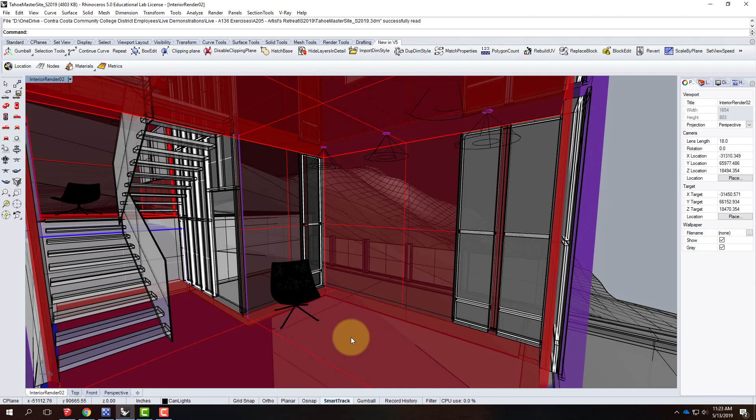And a large part of the section is choosing where in your building you want to cut the section, because there are better places and there are worse places to cut the section. And you just want to make sure that you're thinking about, well, how does this section really show off your building in the best possible manner?

So I went ahead and I opened up my building file again. This is the master site file. I'm going to go ahead and do a save as, because the process of cutting the section is going to be destructive, and I want to make sure that this is a separate version here. So I will call this section 01.

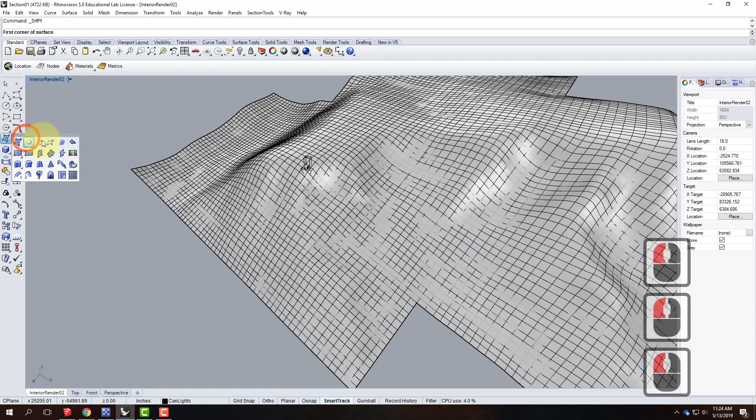There we go. And that way, when I start to destroy pieces of my model, it's not the end of the world. So the first thing that I'm going to do is establish the section plane, which is just a really large plane that intersects the whole drawing. I'll start over here in the standard, and let me go in and create a large vertical plane.

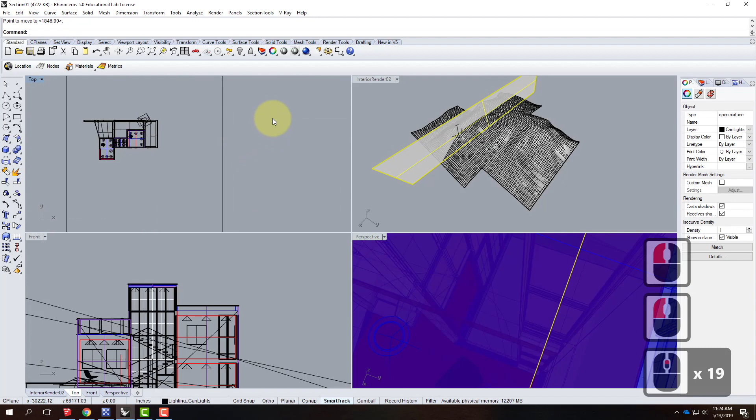I'm going to cut my section so that it goes through the stairs in my building, which is always a nice place to cut your section. Let me move this over a little bit. I may find that it's easier to move it in the top view to see where this section cut needs to be. Once I get close, I'll zoom in here a little bit and fine-tune it.

Like I said, I'm going to cut directly through the stairs because that seems like a really nice place to cut through the building. I could cut on either side of these. And actually, to make it a little bit different, I will look the opposite direction that I usually look. So we'll be looking out this direction. So I'm going to cut toward the back edge here.

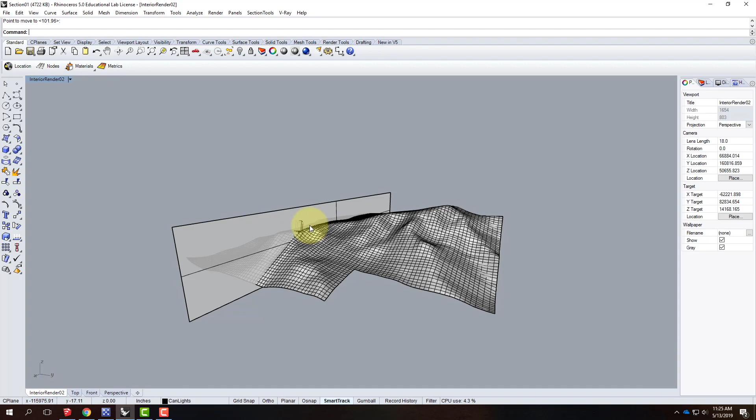So I have that section plane established. I want to make sure that it does intersect the whole model, so I need to move it down vertically just a little bit to make sure that it completely intersects. This particular version, I'm using the Tahoe terrain, and I've turned off all of that big terrain piece. The block is turned off because I don't need that for this particular section. I'm zoomed in way too close, and we're not going to worry about it too much. So I've established my section plane.

Let's go ahead and give myself a little bit of organization here. I'll create a layer called section, and then below that I'll create a sublayer for section plane. And I will take that section plane and move it onto the section plane layer. Change object layer. Make this a little bit bigger here.

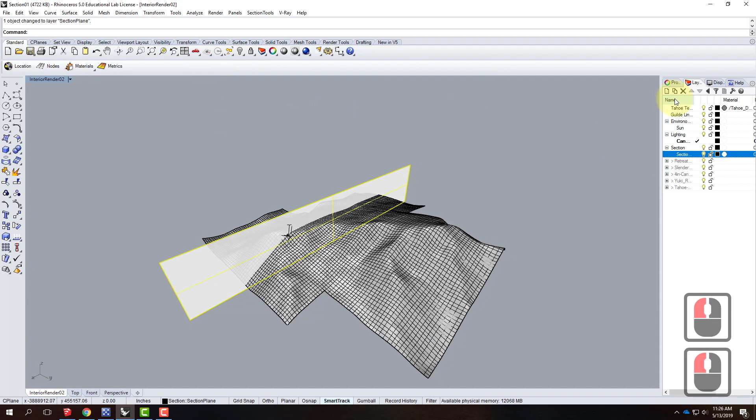And while I'm here, I probably should go ahead and load up my V-Ray toolbars. Let me go to Tools, Toolbar Layout. I'll go to File and then Open. On my flash drive in the Resources folder, I have the V-Ray toolbar. There it is. And I'll go ahead and turn on my object snaps for end, mid, and perpendicular because I was missing those. Probably end up using center a little bit later as well.

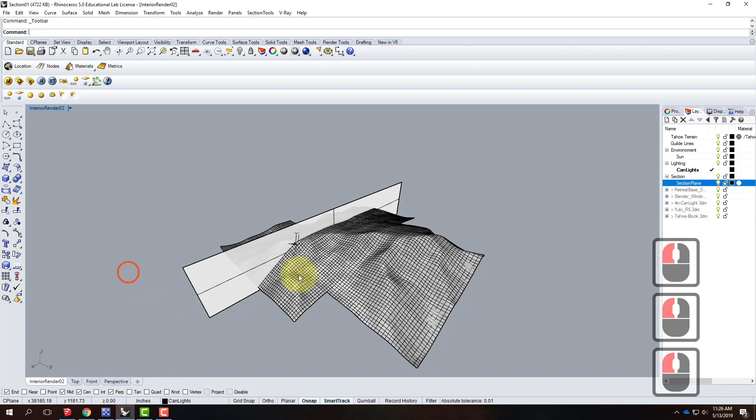OK, so I have my section plane. And just like we did when we were cutting the section before, I'm going to use that section tools command so that I can preview what this is going to look like. And so this time I'm going to look the opposite direction. I'm going to slice through the building over here. Let me actually select the building and zoom selected so that I can orbit around the building. I'm going to slice the building and look that way at the building.

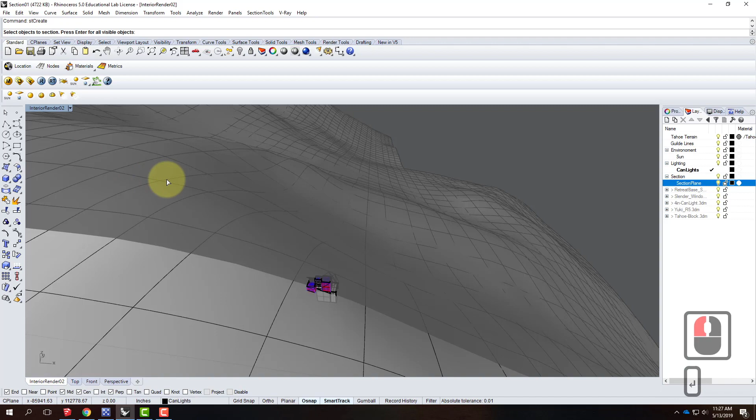So with that established here, I'm going to go ahead and type stcreate. Alternatively, I could go to Section Tools and then choose Create. So I want to create a section. Select the objects to section. It's going to be all. I'll press Enter. But then I'm going to hold down the Control key and deselect that big plane because I don't need to section that plane. I'll go ahead and press Enter when I'm done.

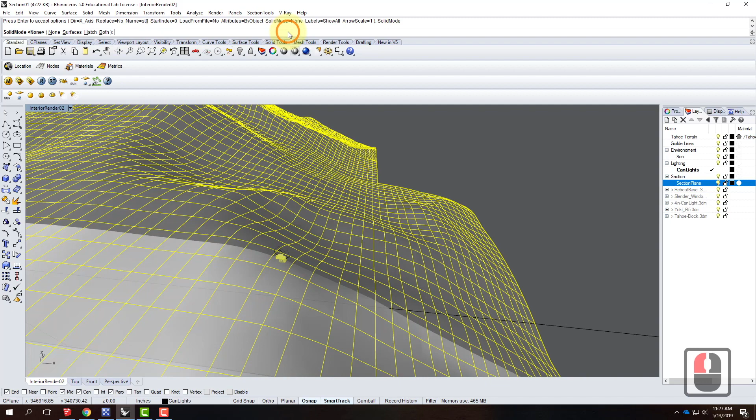And right here in direction, I'm going to look down at my little axes here. It is going to be in the x-axis. And then let's see, the rest of these are all OK. Solid mode should be set to surfaces. Good. And I'll go ahead and press Enter. When I do that, I get my little section icon here. I want to be going the opposite direction, so I'll type F for flip. So it's pointed in that direction.

And then I'll snap to either the center of my plane, which is fine, or at the top of my plane, etc., just so that I'm pointing in the correct direction. When I'm done, I'll go ahead and press Enter, and it creates that first section. Let me turn off the section plane, and then we can view the section or preview the section by going to Section Tools, View.

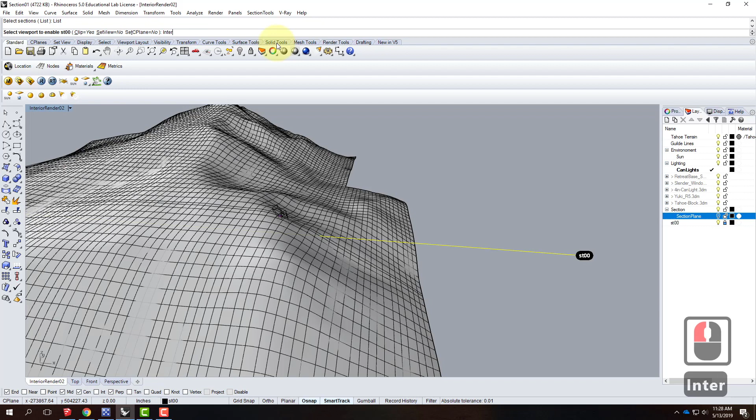And it's available in this list. It's ST00. And I want to view it in the Interior Render 2 viewport, because that's what I'm in right now. So I'll type Interior Render 02. And there it is. Now I can take a look at this.

So let me zoom in on the block. Zoom selected. And there it is. We could see that it was able to cut through rather nicely. I need to worry about what I'm filling in.

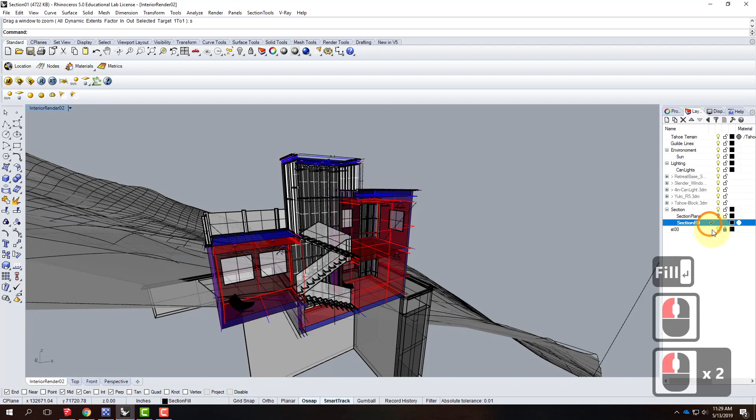So I'll create another new layer. I'll call that Section Fill. Go ahead and make it a sublayer of the section layer. There it is. I'll make it current. And then I need to go through and I need to fill in the parts that I've cut through.

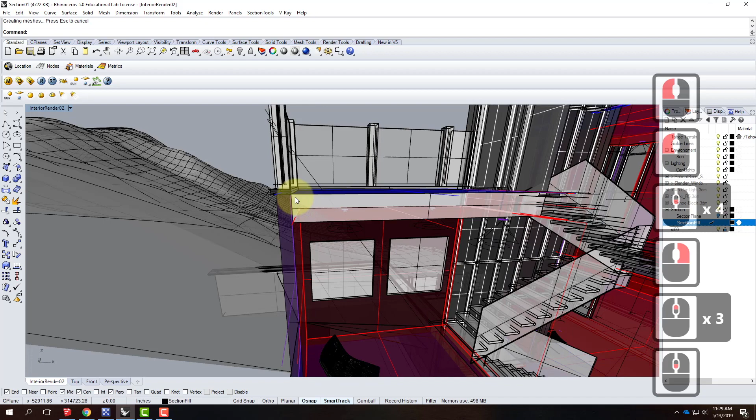So I'll use the rectangular plane 3 points. That always seems easiest to me as I create it. There's my first plane. Second plane. It might be easier to view this in regular shaded mode rather than in ghosted mode.

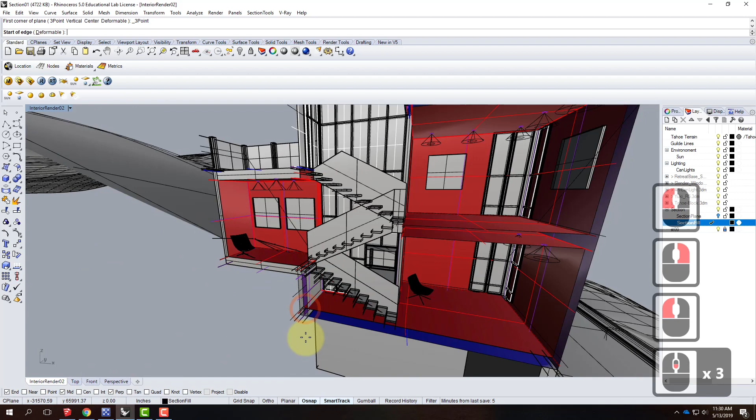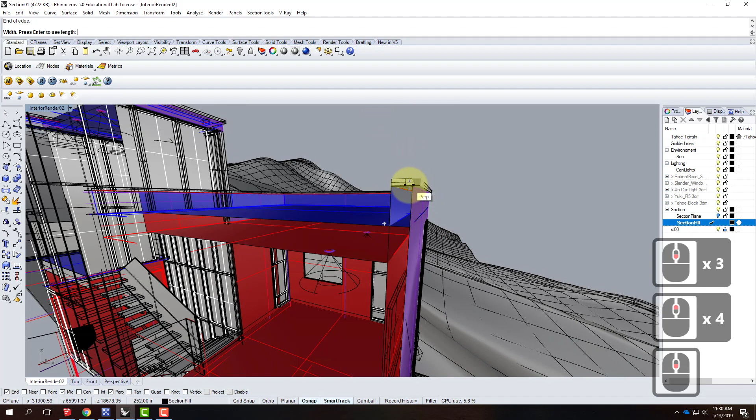Oops, that was bad. I'm going to turn off my center snap because it's not helping. And so bear with me, this always takes a little bit of time, but it is necessary for creating the final rendering.

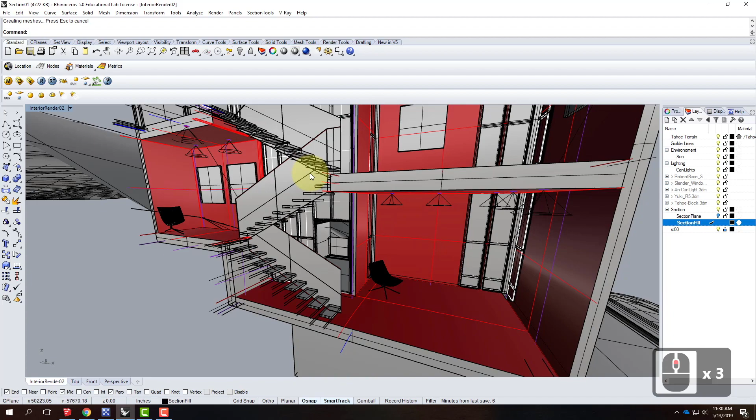All right, looks like I filled it in. The good news is the section tools filled in all of the stairs that I cut through, so I don't really have to worry about those pieces as well. Oh, looks like I got a little piece of roof up here that needs to be filled in. And another little piece right at the top there.

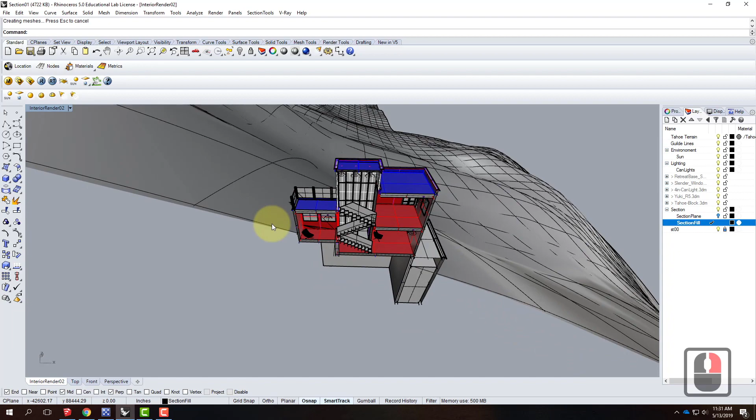All right, so I've got all of those filled in. That's good. That's going to be very helpful down the road for my clay rendering, but it's not quite necessary just yet. I'm going to also offset the curve that goes right along the edge here so that I can create some ground below my model here.

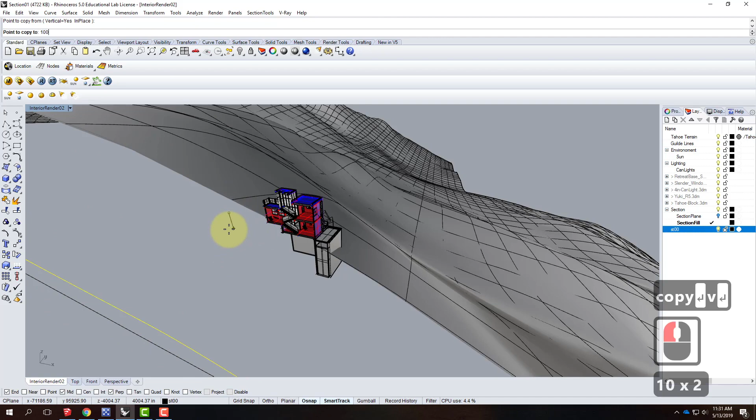I'm going to unlock the ST00 layer so I can actually select this curve. I'm going to copy it, V for vertical, and we'll go down maybe 100 feet. Oh, it doesn't want to do it for me. We'll just put it there. That's good. I'll take this piece and V for vertical again, and we'll move it down.

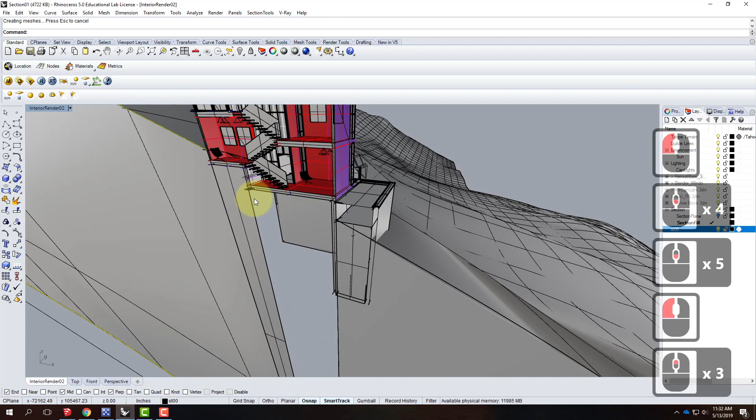And then I could take this, and I can loft those. And I could take this piece, and I can loft those. And then I should add a few rectangles just to finish filling this all in. We'll drop this down. And one more little piece there, like that. I'm just filling that in so that it gives me a nice edge as part of this rendering. Okay, so I have that ready to go.

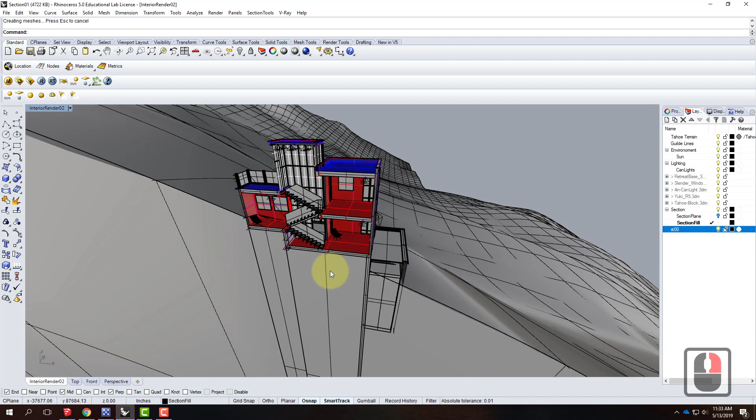Now it's time to set up the actual view so that I can do a make 2D of this particular view. So we'll go ahead and I'm going to switch my view. So I'll go to Set View, and I forget whether this is the front, back, right, or left. We'll try a few. It's not the back. Let's try the front. Let's go to Set View, and let me go to Front.

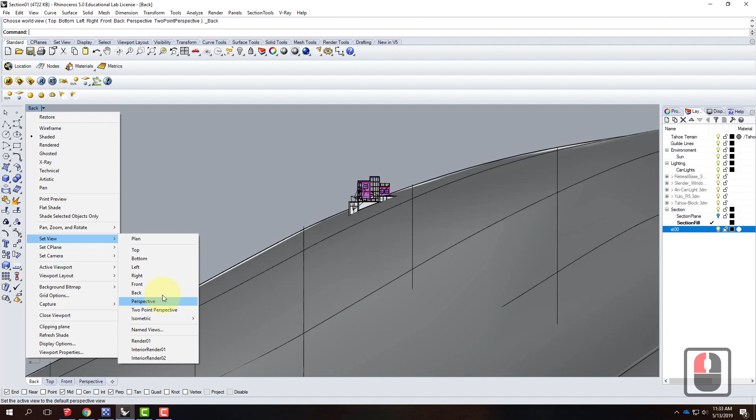There it is. I'm going to position my section so that I'm seeing my section here. And I'm going to save this view. Remember, it's important that we save this view. I'm going to go to Set View and Named Views, and I'll do a Save As. This is going to be the section 00. And I'll go ahead and say OK. That saves section 00 as my view.

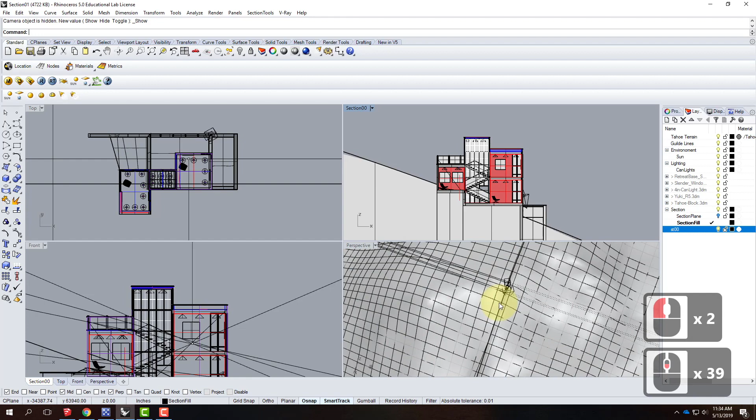It will also allow me to establish the viewport rectangle. So I'm going to go to the little triangle here, go to Set Camera, Show Camera. Remember, I'm not going to see it in this view, but I am going to see it in my other views. So here's Perspective View, and there's my camera points. Let me switch this into wireframe mode,

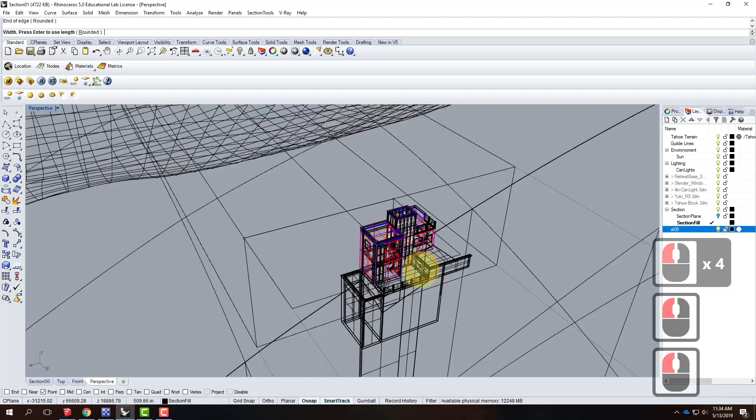and there it is. I'm still on the Section Fill layer, and I will go ahead and draw a rectangle with 3 points. It's not a surface, it's a rectangle. And I'm going to turn on my point snap and turn off the other snaps so that I can hit just the points of the camera. There's 1, 2, and finding the third one in this mess can be a bit of a challenge.

There it is right there. So there is my viewport rectangle, but it's only a quarter of what I need. I'm going to scale it, so I'll type Scale from the upper corner here by 2, and now it's the full size of my rectangle.

If I were to double click out of the perspective view, we could see in the section 00 view, it's just showing along the edges there, which is what I want it to be.

So at this point, it's time to do the Make 2D of this particular scene. If you're having trouble with the Make 2D, you might explode the blocks first. Alternatively, you might turn off some of the more complicated blocks, like the chairs or furniture or whatever.

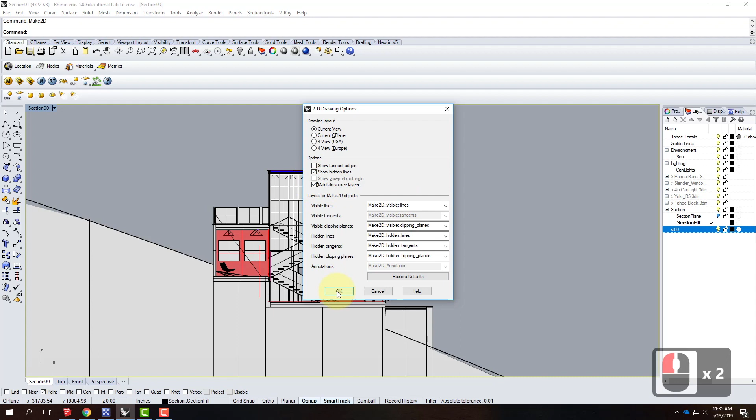So I'm going to go ahead with section 00 showing here. I'm going to type Make 2D, and it's going to be of the current view. I'm going to go ahead and show my hidden lines and maintain my source layers, and I'll go ahead and say OK.

And this is going to create my Make 2D. When it's done creating, I should be able to see it in the top view. Let me zoom selected. Sorry, I didn't select everything when I did the Make 2D.

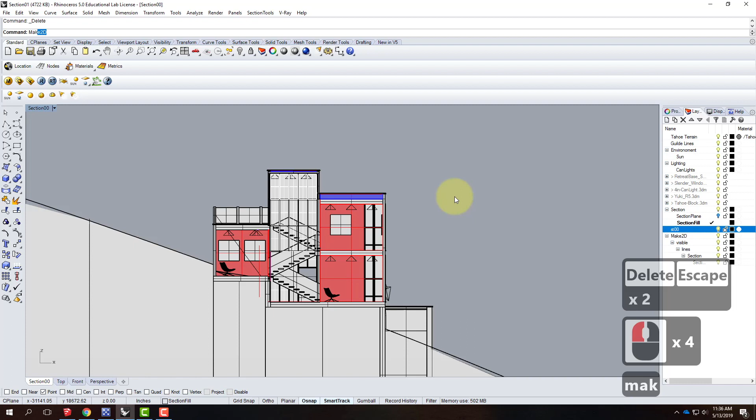Let me jump back. Section 00 here. Make 2D, all, there we go, and I'll go ahead and press enter. Current view, all the rest of these options are the same as the last one, and now it'll take a little longer. I thought it went too fast.

So let me let this go for a little bit. You guys can work. I'll bring you back, and once it's done doing its Make 2D, it can take 2 to 5 minutes or so.

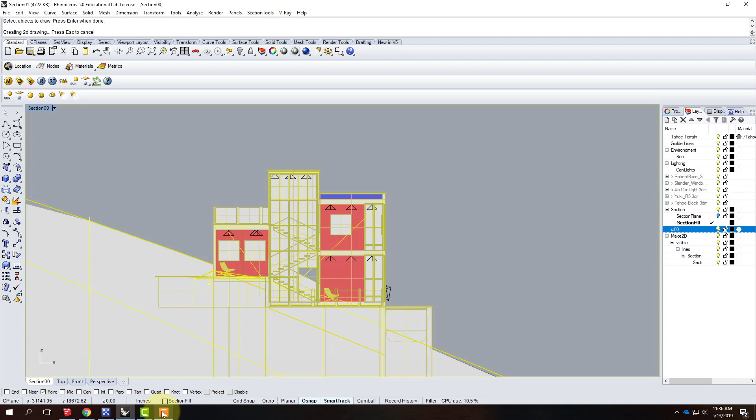Looks like it actually went pretty fast, so let me, in the top view here, let me do zoom selected. There it is. Remember, there's always lots of extra lines that I don't need. The part that I care about is what showed up inside of that rectangle.

So let's use that rectangle and this rectangle as trims. I'll type trim, and I'll get rid of the stuff that is outside of it. So we'll get rid of all of that. There's always going to be a little bit of cleanup to do as well.

I can then take everything that's inside this rectangle. I'll move it so that this corner here, let me turn back on my endpoint snap, is at 0, 0, 0. Z followed by S for selected, enter. And now I'm back at 0, 0, 0.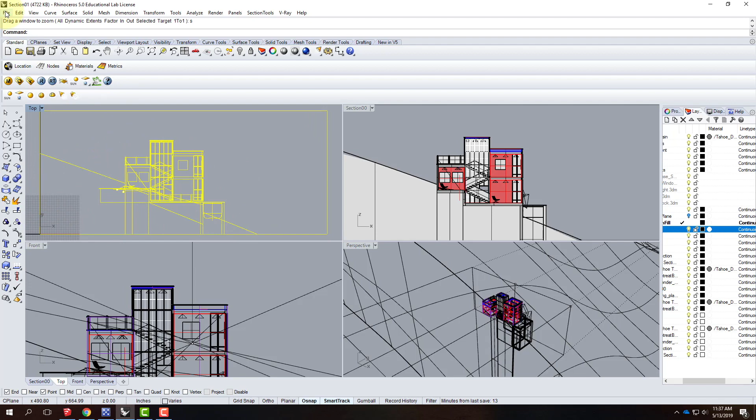There's my drawing, and I can now export for Illustrator. I'll go to File, and then Export Selected. We're going to change this type to be Adobe Illustrator, and I will save it to my flash drive for today.

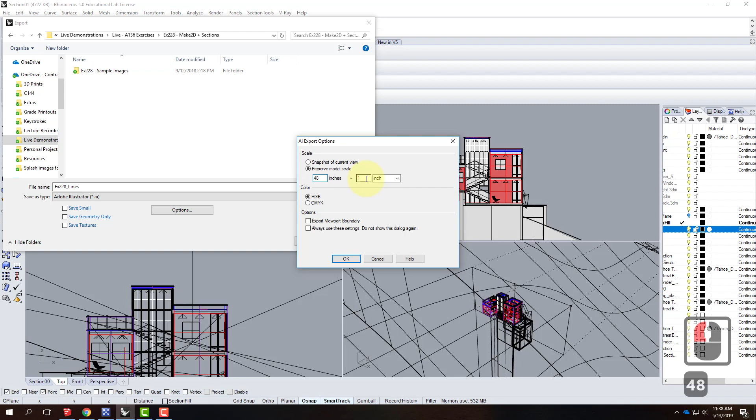And under Options, I'm going to preserve my model scale. It should be 48 inches equals 1 inch. That's for quarter inch equals a foot scale. I can go ahead and say OK after that. And then I can go ahead and click on Save, which is going to save my line drawing for Illustrator.

Let's go take a look at that in Illustrator just to see what it looks like. I'll double click on Adobe Illustrator to open it up. And then once it's open, I'll go to File and then Open. And I will choose that Illustrator file. There it is.

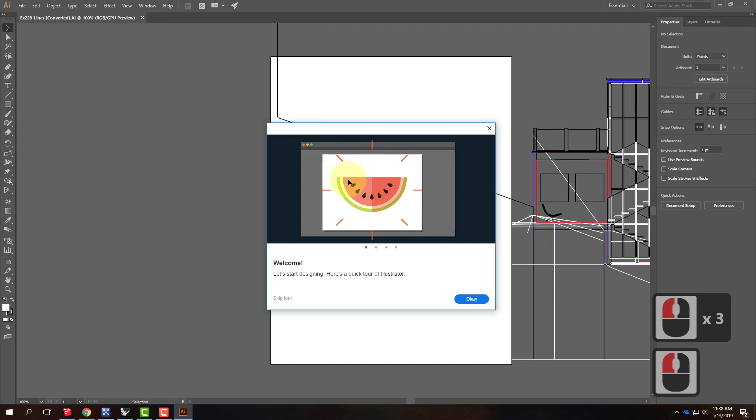I'll press Control-minus to zoom out. Let's get rid of the splash screen here. And we can see there it is. I do still need to adjust the artboard, so I'll click on the artboard tool. And I will adjust the artboard so that it snaps to those edges. And there it is. And now my artboard matches my line drawing.

And so these are all live lines, and I can start to work with line weights. I'm not going to do that quite yet. I'll come back and do that. I'm going to move over into the clay rendering first, and then I'll come back to this particular view. So we'll leave this one open. And I'll jump back into Rhino.

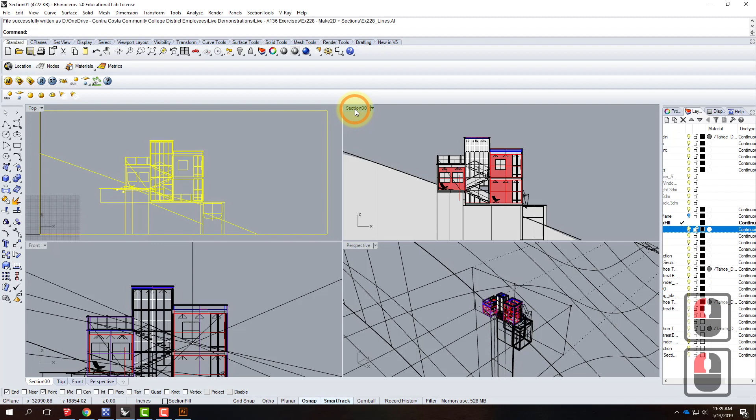And now I want to make a clay rendering of this particular view. Now the problem is that V-Ray still doesn't recognize the section tools. So I need to go through and do that split and then assign the cThru material to perform this particular rendering. So I'm going to leave section 00 open here, but I'm going to work in the perspective view instead.

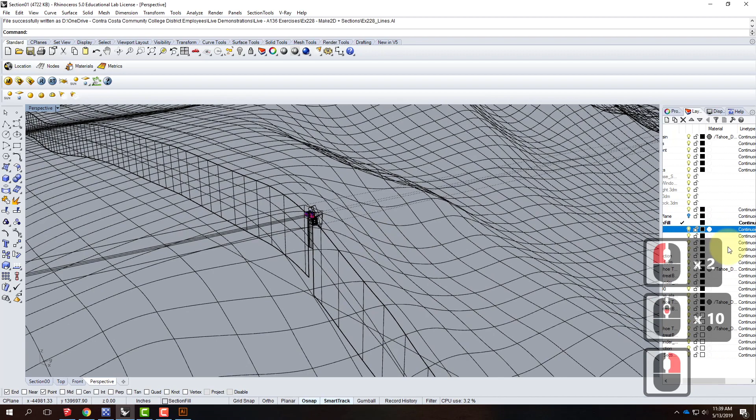So let's go ahead and make sure that my big section plane is turned back on. There it is. I'll change my view mode into shaded so that I can see it. And now it's time to start exploding blocks. So again, this is a destructive process. I'm going to type SEL block instance, and then I'll type explode.

I'll hit escape twice to deselect everything, then type SEL block instance, and explode. Escape twice so everything's deselected. SEL block instance, explode. Escape twice, SEL block instance again - no more blocks, so no objects were added to the selection. Everything's been exploded, that's good.

Now that everything's been exploded, it's time to do the big split. I'll type in split. Select objects to split - it's going to be all. I'm going to hold down Control and deselect that big plane, so I have everything selected but that big plane. Then I'll hit Enter.

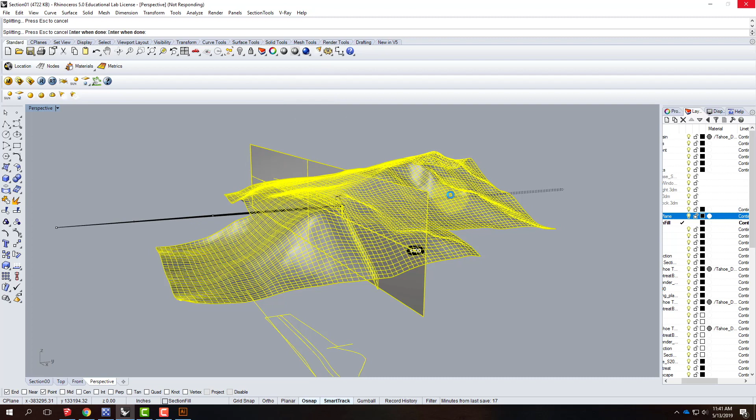Then it's going to ask me for the cutting objects - that's where that big plane comes in. I'll select that big plane, and when it's done I'll hit Enter, and it'll start running through the big split. OK, so it just finished its big split. That's good, now it's time to start assigning the materials.

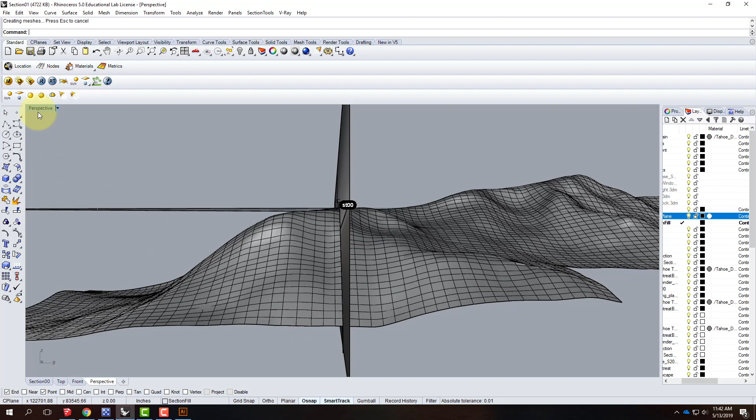All of the objects on this side of my view need to be turned into the cThru material for rendering purposes. So I'm going to go back into one of my side views - either the right view or left view. Let me go to Set View, and let's try the right view first.

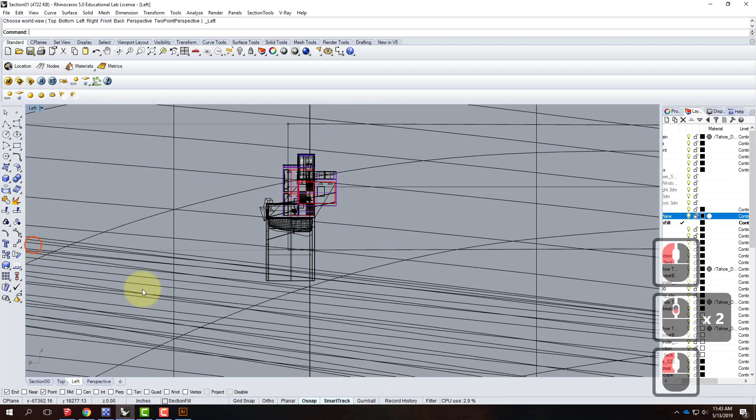Let me actually do it from the left - I think it'll be easier to make my selection from the left, so I'll switch to the left view. The reason that's a little easier is because I can select from right to left, and everything that this touches will be what I need to turn into the cThru material.

Let me deselect - I'm going to hold down Control here. And there we go, perfect. So I've got everything on this half, but I need to go through and make sure I don't have any of the glass layers turned on here, so let me go through and find my glass.

There's one. There's two. Oops, sorry, wrong button. All right, I think - oh, one more here. There we go, I think I got all of my glass.

OK, so I've got all my glass deselected. Now I can go ahead and apply that cThru material to this.

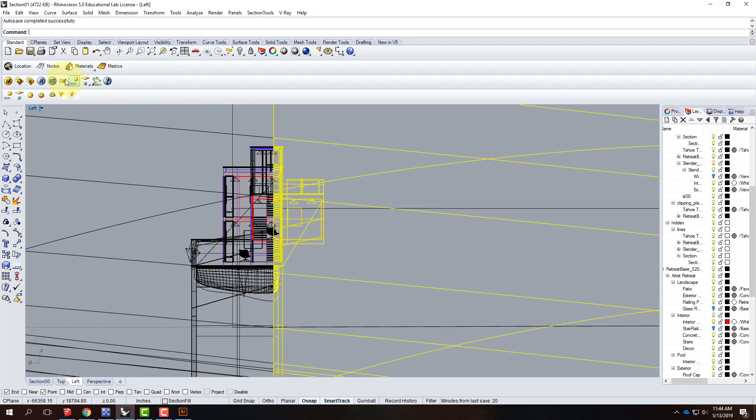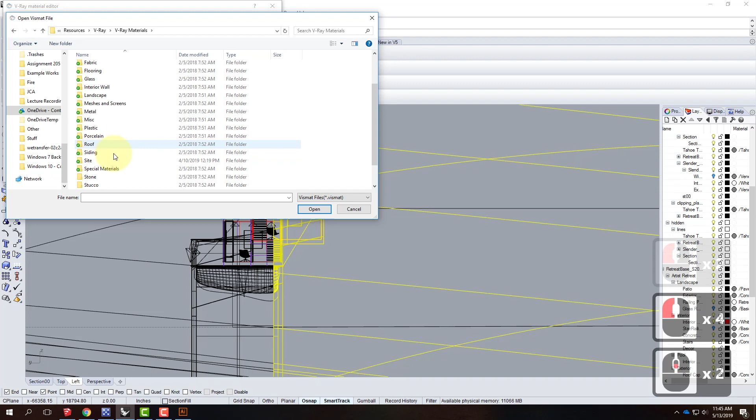I'll go into my V-Ray material library. I'll right-click on Scene Materials, go to Load Material. I already have this on my flash drive - if you didn't, you could follow the tutorial to create it yourself, or download it from the course website under the Special Materials selection. I'll go into Resources, V-Ray, V-Ray Materials, Special Materials, cThru, and there it is.

I'll open it. This cThru material isn't a material that can exist in real life - it's transparent to the eye, but opaque to sunlight. I'll right-click on it and say Apply Material to Selection, which will make the cThru material on everything currently selected.

That's good. Now that I have that applied, I'm going to go through and reselect all of the glass. I'll go through and look at the objects I turned off, and I'll say Select Objects on each of those layers as I come down. So when I turn the object back on, I'll right-click and say Select Objects, for each one.

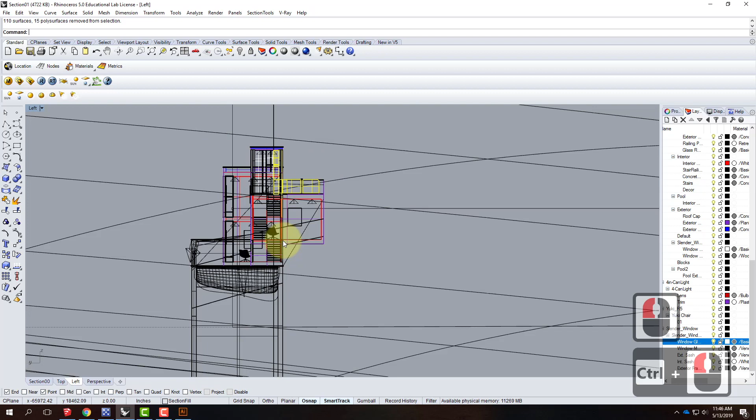Now in this scenario, I need to deselect everything on the side of my rendering where the glass is normal, so we're going to deselect everything to right there. But everything on this side of the section needs to be turned into just a transparent material.

I'll click on my V-Ray material editor and create a new simple transparent material. I'll click and say create material standard. This material is going to have white for transparency, and I can preview it - yes, it's fully transparent. I can also call it transparent.

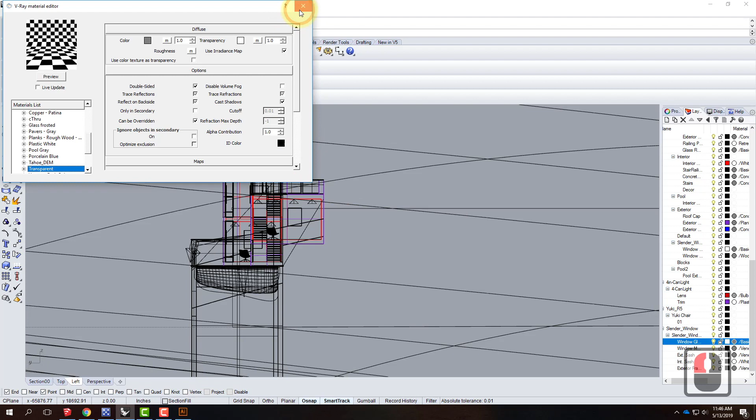I will then right-click on the transparent material and say apply material to selection, so all of that glass becomes the transparent material. There it is. I'll deselect now, and now I need to assign the clay material to the other half of this model.

So I'll go ahead and switch my view. I'll go to set view, and I'm going to switch from the left to the right to make my selection a little easier, which will allow me to select from right to left. I can select everything here, and with everything selected, I can go ahead and apply that clay material to it.

But before I do that, I need to again turn off all the glass, so I'll jump back up here and turn off anywhere where there is some glass.

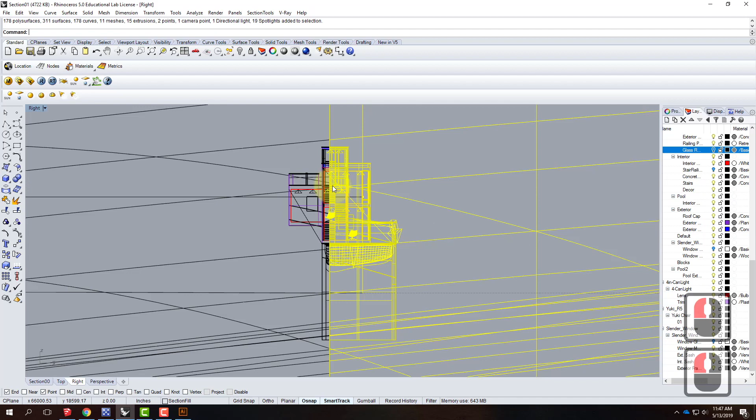That should be all of the glass deselected. I'll go into my V-Ray material editor, and I need to create a material that is just clay. I'll right click and say create material standard, and I'm going to choose kind of a light gray for this, say OK, and rename this to be clay. If we preview it, yes, it looks kind of like a clay material here.

I'll right click on clay and say apply material to selection. That will apply it to everything that I have selected here. I do need to go through—the glass can stay the glass, I'm OK with that staying as glass. But I want to turn them back on like that, and like that. So the glass is back on.

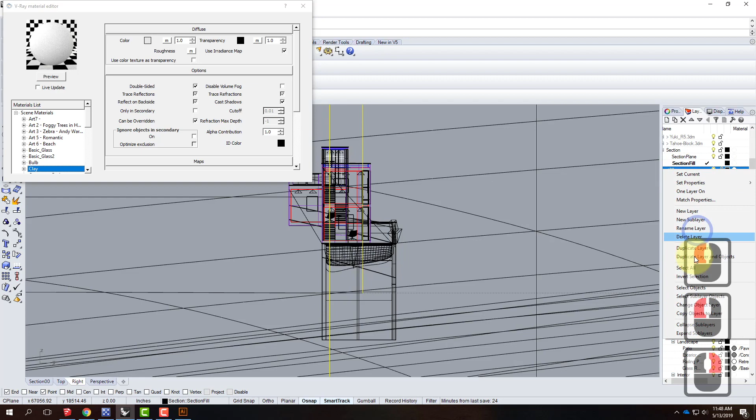I also need to find that section layer with my section fill. There's my section fill. I want to select all of these objects, so let me say select objects. I should also select these objects, so I have all of those section fills selected. And I can then apply the clay rendering to those as well, so let me apply material to selection. Perfect, that just fills in all of the selections.

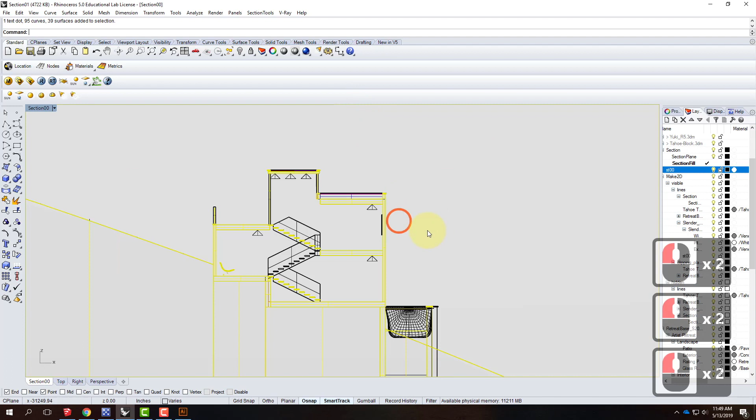At this point, I'm ready to move back into my section 00 layer. Right there, this is where I can actually perform my rendering. I do need to turn off that big section plane. But now I'm ready to go ahead and perform the clay render.

Let's take a quick look. I'll go into my V-Ray options, go into output, and I'll unlock and make sure that I get the current view aspect ratio. There it is, I'll lock it again. Under width and height here, I'm going to start really small, I'll do it at 100, and then we'll perform a rendering and make sure that it's actually turning out the way that it should.

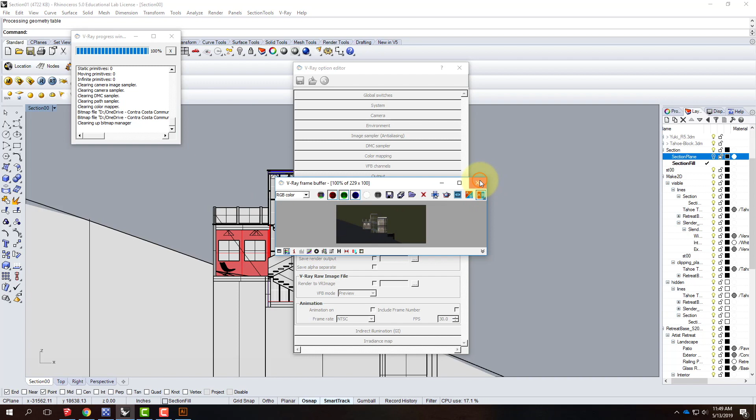All right, looks like it turned out pretty well. I'm a little bit confused as to why the terrain in the back of this view is not clay rendered as well. Let me go to my V-Ray materials and make sure that clay is applied to that, and let's double check it again.

It may be just the background of the HDRI that's showing. That's another option, so I may end up just cutting that off when I move it into Illustrator. So the quality of it looks OK.

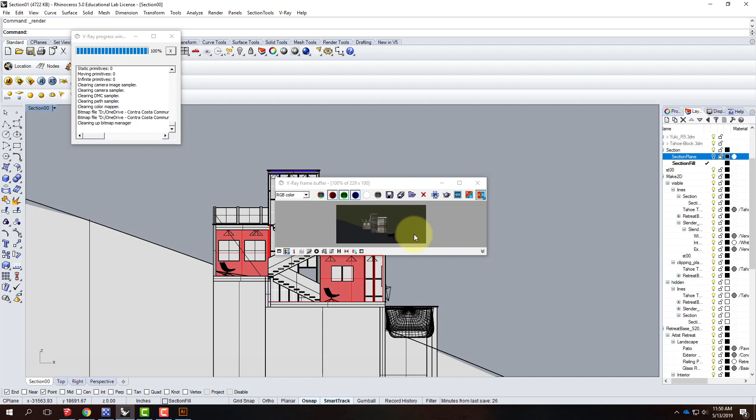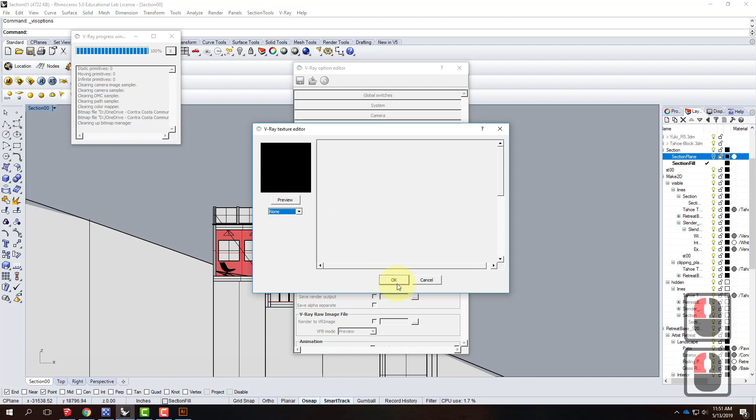I'm going to go ahead and render it at a higher resolution. I'll go to my V-Ray options here, and you know what, I'm going to go into environment and see if I can solve that problem right now. In the reflection background, I'm going to take away the TexBitmap, and then I will assign just plain white to the background. Let's see if that solves the problem. Yeah, there we go, much better.

So I got rid of that background HDRI, now I'm seeing it just as gray. That works for me, perfect. So at this point, I need to do a higher quality rendering, I'll bump up the rendering. The proportions stay the same, and I can go ahead and render this in the background.

While that's rendering, I'm going to jump over into my Illustrator file and start prepping over here. Just as what happened last time, I chose to keep all of my layers when I did the Make 2D. I need to organize this into both hidden and visible layers, so I'll create a new layer for hidden, and I'll create a new layer for visible.

Then I will go through and I'll select all of the visible layers. I'm holding down Control while I do this. Go ahead and move those up onto the visible layer. There we go, all those are hidden. Missed a few visibles here.

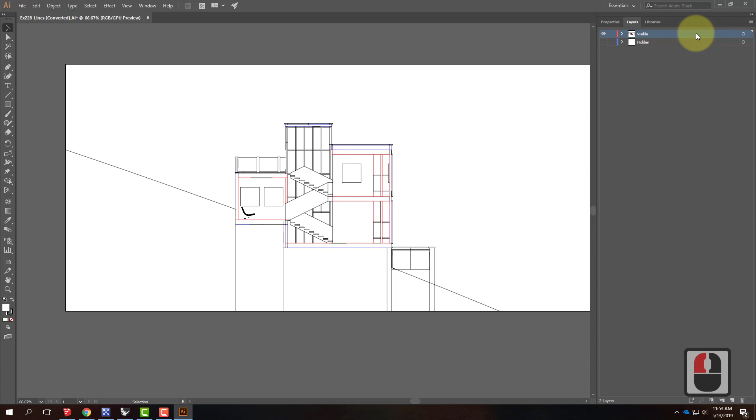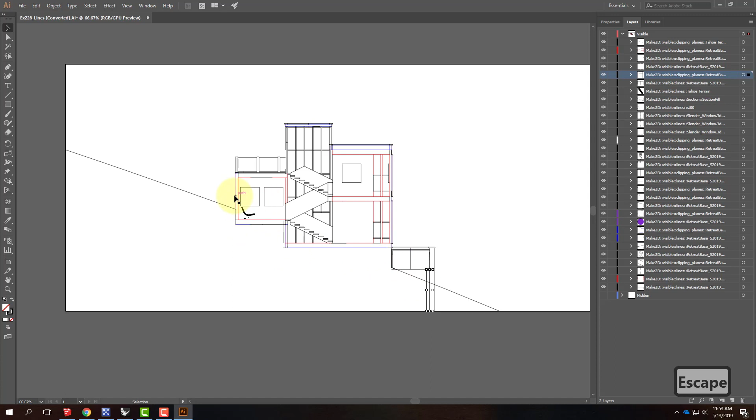This is where we need to do some cleanup. So we can see some of these lines don't really belong. I can get rid of that line. I can get rid of that line. I can get rid of this line here. I can get rid of that line there. So that one intersects, so that's going to be a little bit challenging. It looks like I'm missing part of the bottom of the pool. So there's always little bits that are going to need to be adjusted here.

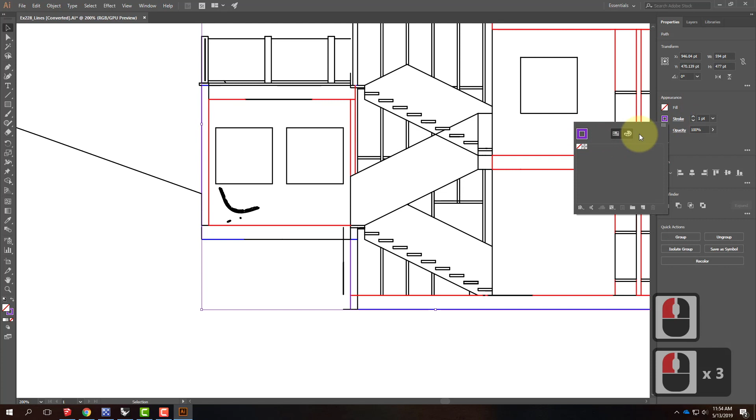I can also, on any one of these, like say this purple one, I can go to the Select menu and say Select Same Stroke Color. That's going to select all of those parts. And I could then go to Properties, and I could say that instead of being purple, I wanted them to be black, which of course isn't available there. Let me change it over here. There we go. Those are all black now, and I want their weight to be a little bit thicker because they tend to be the outer part.

The inner ones, these red ones, I could go in and say Select Same Stroke Color. That would select all of the red. We could change those to be black as well. And we'll make those 0.75. And now all of those have been changed. So there's always little bits of touch-up. Looks like the chair really didn't come through too nicely, so we'll go ahead and just delete the chair. I'm not going to worry about that too much.

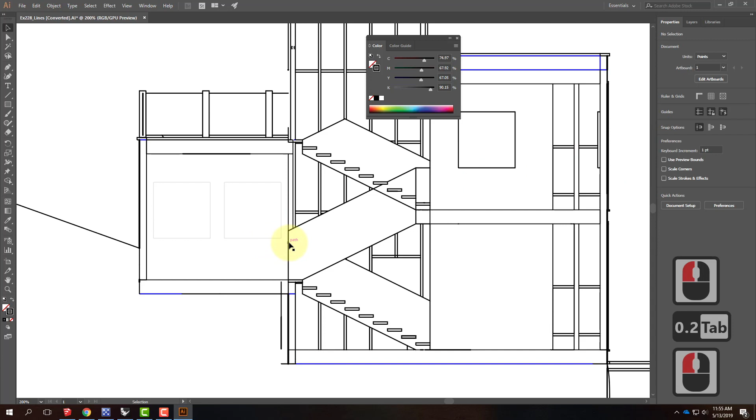Sometimes there's little bits of detail like these art. We don't need those to be so strong. I'll come in here and change it to maybe 0.1 so they're nice and thin. That might have made it disappear for you guys altogether, so maybe 0.2. See if you can see it a little bit better. No, you can't. Not quite sure what that. Sometimes you have to zoom in here. Just in how it was made.

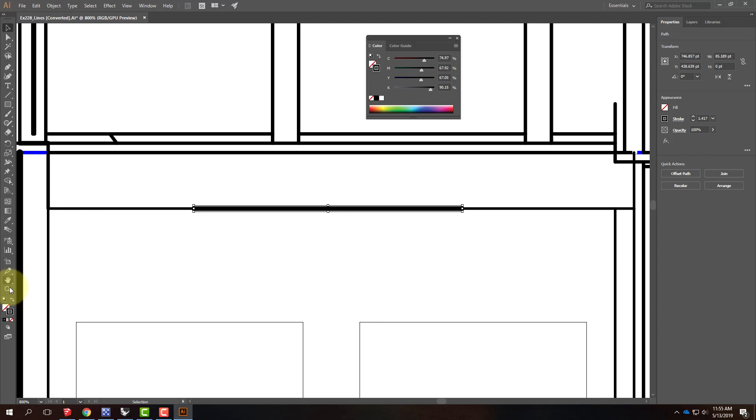If I want to take this line and make it match that line, I select the line and I can click on the eyedropper tool, which is right here, and say match it to that line, and it will adjust there as well. So there's always some fine-tuning control that needs to happen. You know, like these glass railings probably need to go down to maybe 0.5. So they become a little thinner. Those guys, same thing, 0.5. Control minus or Control 0 to zoom out.

And so as you start to work through it, you're going to see that the line weights will start to show up. There's a few little issues that need to be addressed for me as well, like I'm missing part of the upper railing here and what have you. So I can go through and I can make those corrections, but I don't need you to sit and watch me make all of those corrections.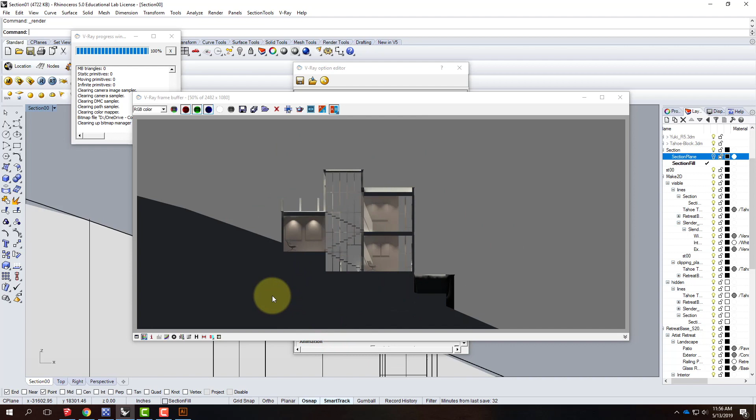But by now, my clay render should have finished. So there's my sectional clay render. Remember, because of how I created it, I'm getting the full shadows of how the sun is coming into the space, which is the big advantage here. With that selected, I can go ahead and save all of my channels. So I'll click on Save. I'll go into my flash drive. And I'll go ahead and save that. That saves everything. I can then go back to my Illustrator file.

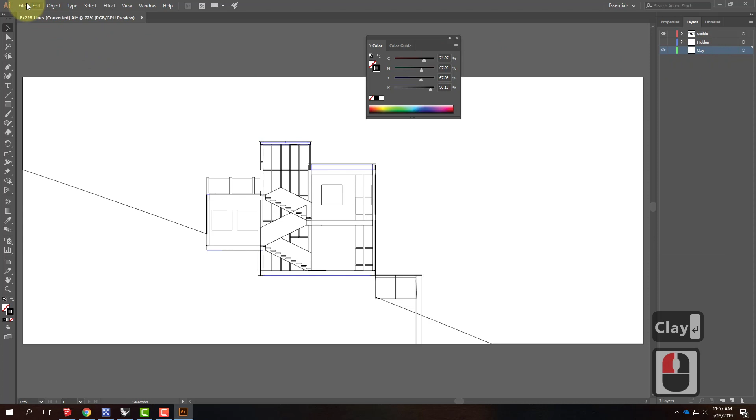I'll create a new layer. Make that go away. Let me create a new layer. This will be my clay. I want it to be below everything else, though, so we'll put it at the bottom here. Then I can go to File and then Place. And I can drop in that clay render right here. Remember, I am going to have to adjust the size a bit. So let's hold down Shift. Let's adjust that size over. And there it is, matching up with my building.

This ends up looking way too dark to me. So I may take it, go to Properties, and I might adjust the opacity of this. So there's my opacity adjustment. I might need to make it lighter so that all I'm really seeing is the line drawing with a little bit of the shadow behind. And again, that's a personal preference for what you want to see.

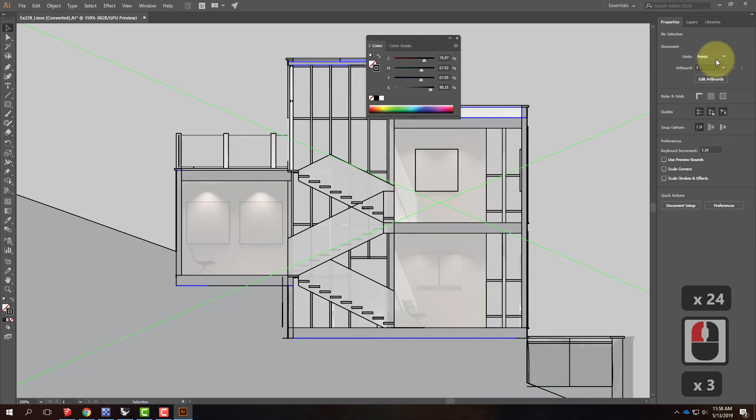You may also decide that certain elements of this need to be filled in, and you want those to appear darker. If that is the case, I suggest using both your hidden and visible layers, copies of both. So let me go ahead and select them both, and I'll say Duplicate Selection. Oh, come on.

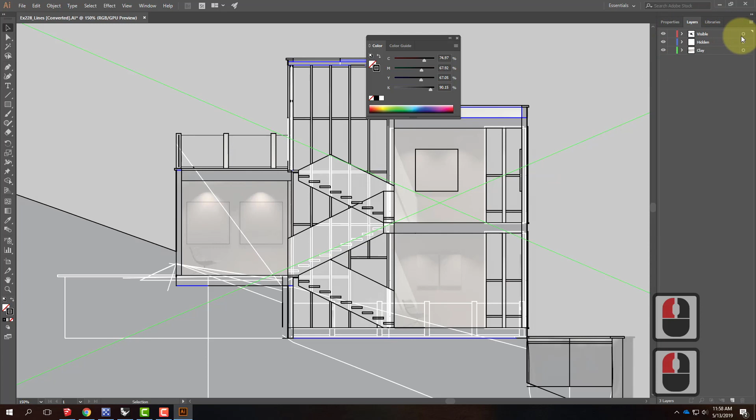Duplicate visible. Oh, it's not going to let me do it. OK, well, I'll have to do it the old-fashioned way then. Let me select both sets of lines. There it is. And once I've done that, I'll go to Object, Live Paint, Make. That will make a live paint group of these objects.

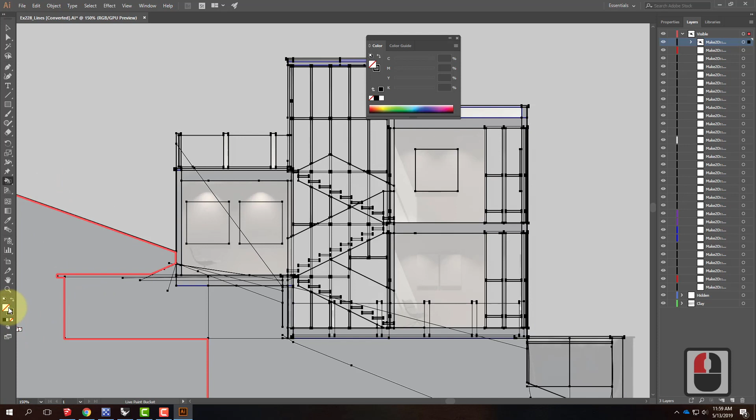I can then use the Live Paint Bucket tool, which is available underneath the Shape Builder tool, or you can press K. And I can actually choose to fill in certain shapes. So I could fill in where the walls are. Whoops. Make sure that it is black.

And actually, to make this easier, I'm going to fill in with a different color, and then I'll move layers afterward. So these are just filling in the pieces of the building that are solid. So I can go through, and I could say, OK, that, and that, and that. So I'm not doing the most careful job, but I spent a little bit more time going through this.

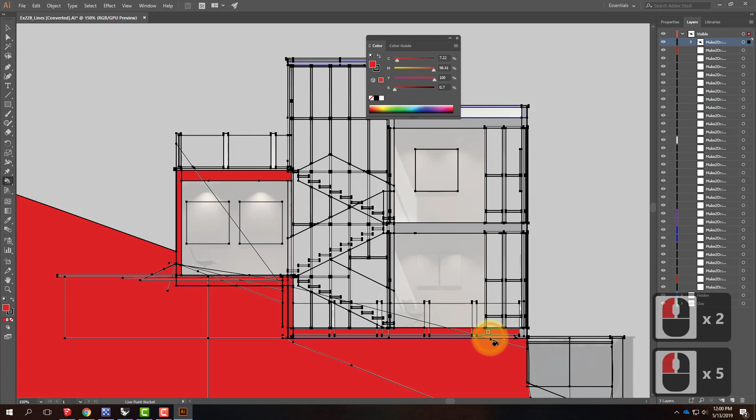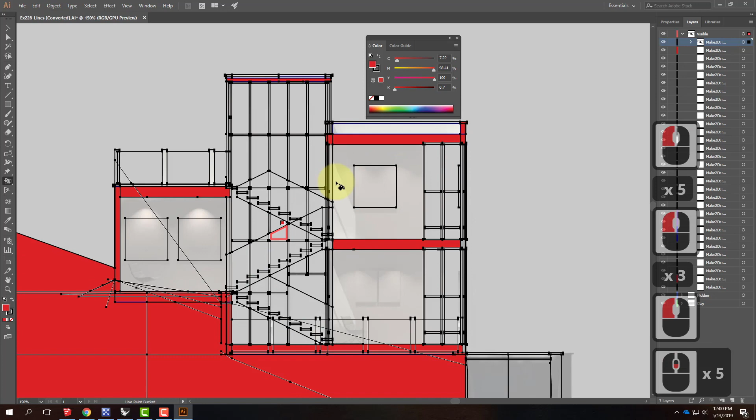And maybe ultimately I should have only included the visible layers instead of the hidden layers too. And so I'm not going to make you watch and go through all of the stairs, but I would keep going and keep selecting everything that's being cut through like that. Once I'm done, I'll go back to Properties here, and I can go to my Edit and Live Paint Expand. That breaks apart the shapes that I just created.

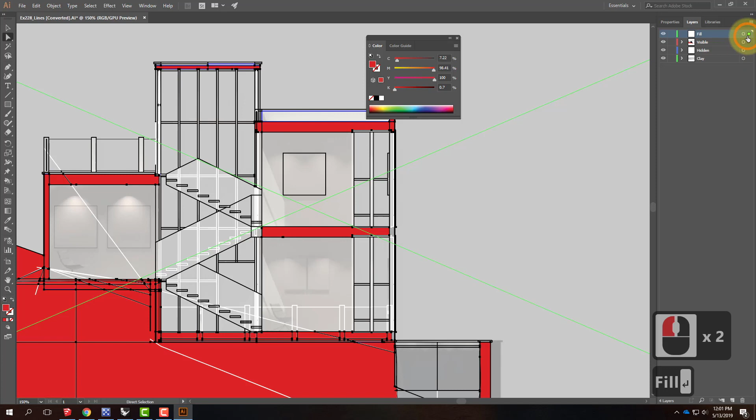I can use the direct select tool to select one of the reds and then say select same fill color. It's going to select all of the reds, and then I can move them onto their own layer here. Create a new layer for fill. Move them underneath everything else, and then I can change the fill color to be black, for example. Let me press Control-0 to zoom out, and you can start to see this becoming its own drawing.

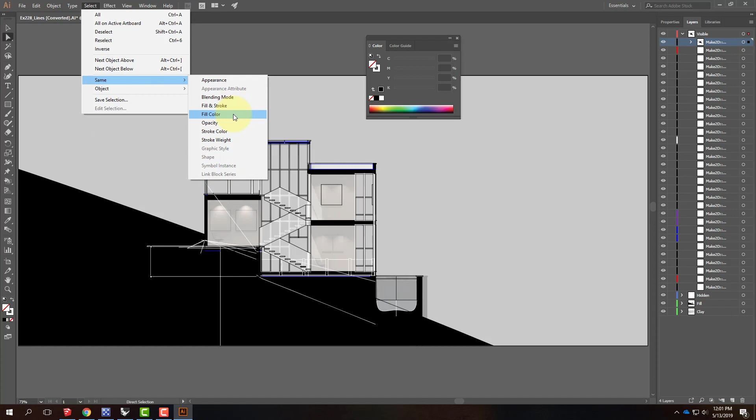I still have a lot of hidden lines that are in here that I haven't changed just yet. So let me go ahead and select same stroke color. That'll select all of the hidden lines. And I'll change that color to maybe a gray. I'll also change the property so that those are small, 0.25.

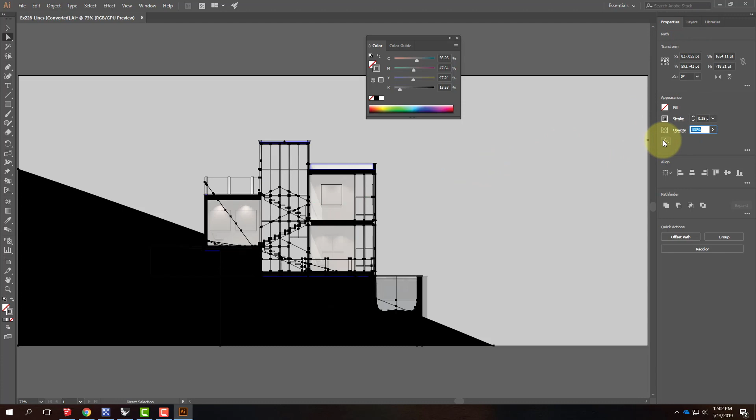And I might change them to be dashed. So let me go ahead and go to Window, Stroke, show the options. And I could say that I wanted it dashed at 2 by 2, for example. And those are going to start to show up there as well as you zoom in. So anyway, the point is that I can go through and I can fill in my section so that it starts to read nicely as a section.

I have my clay rendering, which provides some of my shadows underneath. You guys on the projector probably aren't seeing that as well as I am, in which case maybe I should adjust the opacity so that it's a little bit stronger so you can see it. There it is. So we're getting the rendering of what's happening inside, but we're getting the line drawing on top.

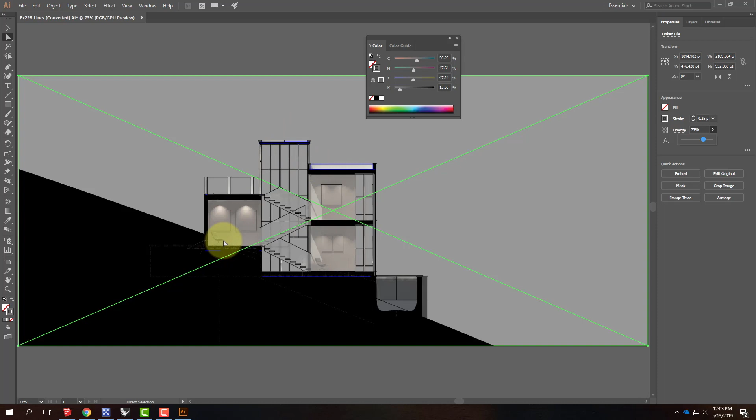There are still lines in here, purple and blue, that I haven't changed colors yet. I will continue to work on it and get that all touched up so you can see the final version at the end. But this is the process of creating a section. It's very, very similar to the plan. It's just the orientation that's a little bit different.

Okay? So this is the last of the 3. You're going to pick 2 of them. So elevation, plan, and section, you pick 2. You're going to turn in 2 of those as part of your final for this class.